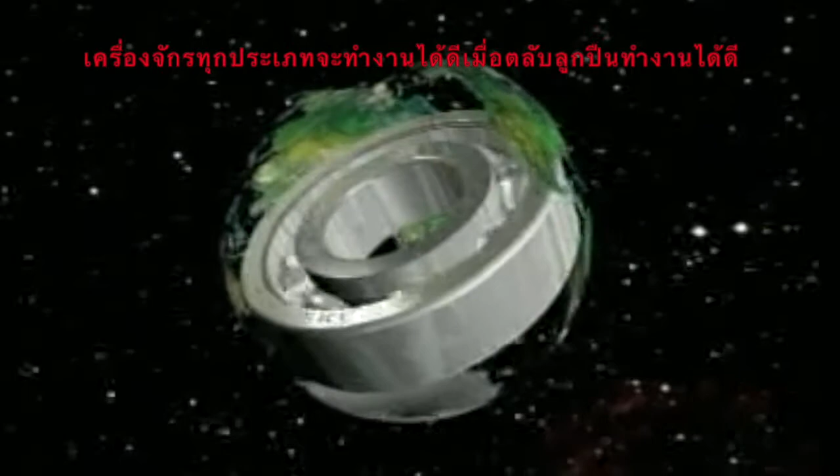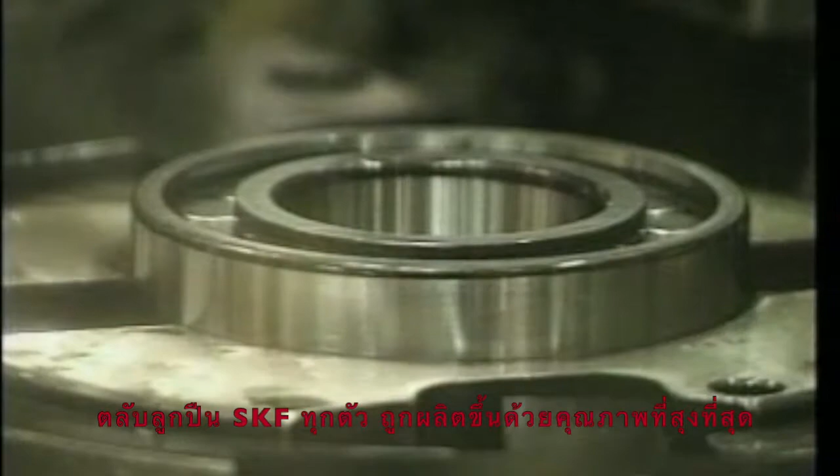In all industries, the efficiency and reliability of plant and equipment is dependent on the rolling element, the bearing. It's the heart of all rotating machinery. To ensure a long and trouble-free life, each SKF rolling bearing is a product of the latest technological development and manufactured to the highest precision and quality standards.

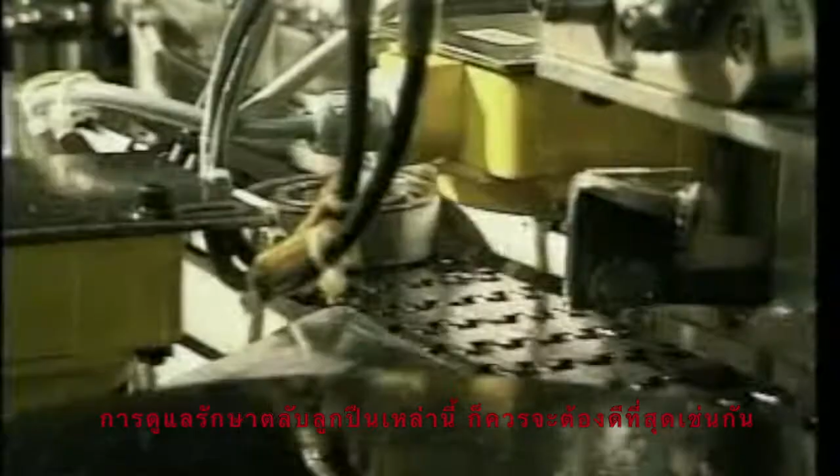It's essential that during replacement of bearings, they should be kept as clean as possible and that the correct handling techniques are used. Like the human heart, the service life of the bearing and the reliability of the plant will be compromised if any of these essential factors are ignored when replacing bearings.

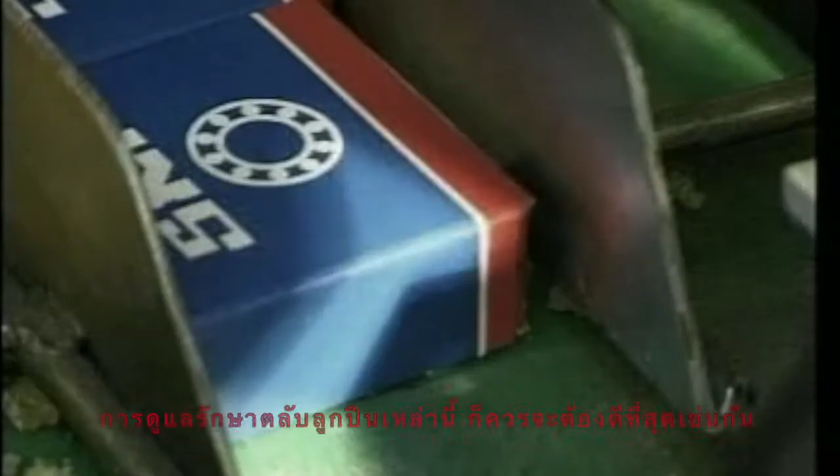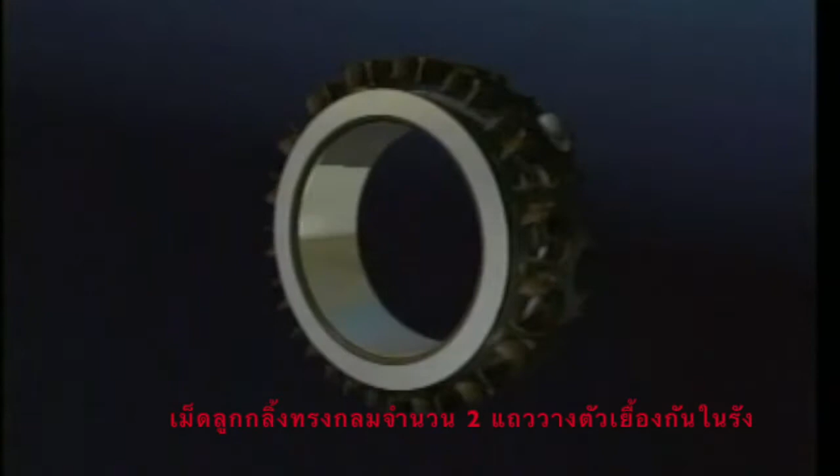This SKF training film is about self-aligning ball bearings. The self-aligning ball bearing consists of 2 rows of balls secured and separated on the inner ring by the cage, and a sphered outer ring raceway.

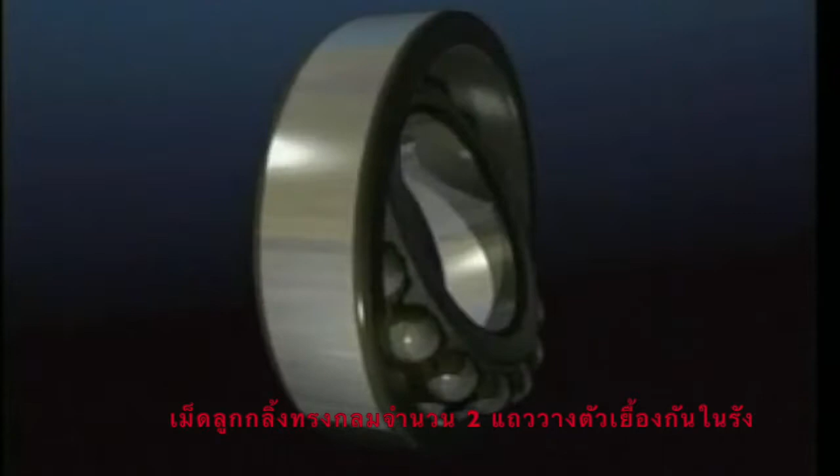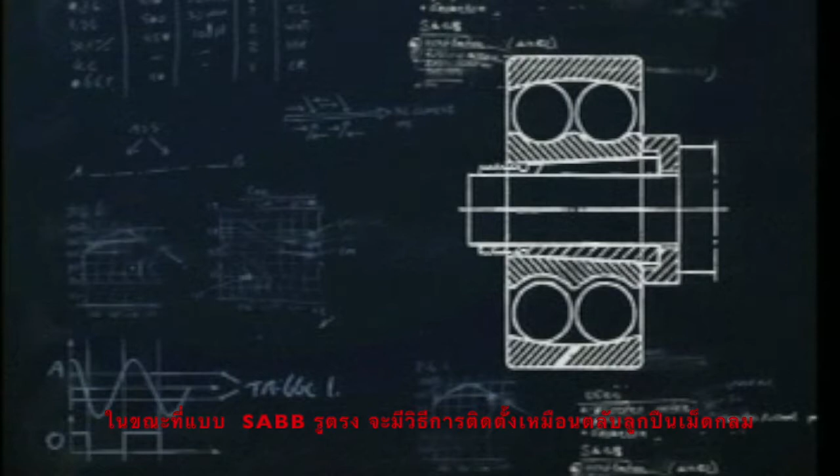There are 2 types of self-aligning ball bearings: those with a parallel bore and those with a tapered bore. This film concentrates on the tapered bore type because they're mounted and dismounted in a particular way. The parallel bore types are mounted and dismounted with the same procedures as used for deep groove ball bearings with a parallel bore. They're commonly used in applications like mixing, blending and stirring machinery, also in intermediate shaft positions and fan applications, where the ability for self-alignment is important and the loads are relatively light.

For the mounting of the self-aligning ball bearing with tapered bore, SKF supplies a lock nut spanner kit that ensures the correct bearing adjustment is achieved.

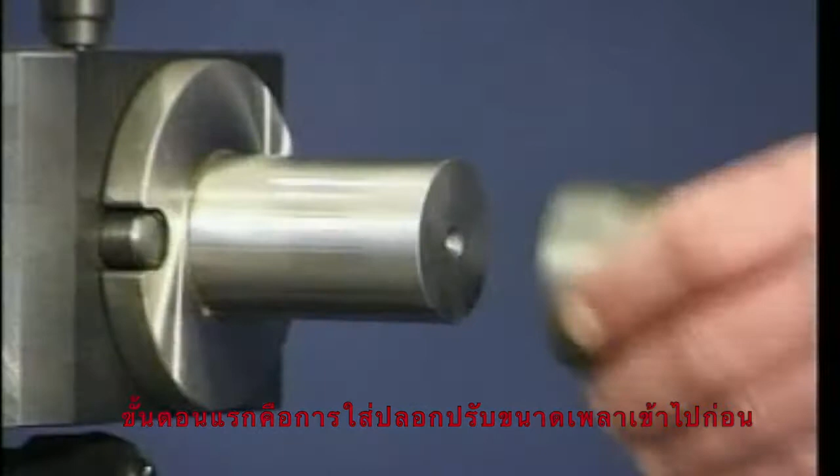Make sure that the work area is kept as clean as possible. Use some light oil on the mating bearing surfaces. Do not remove the bearing from its package until everything is ready for mounting it.

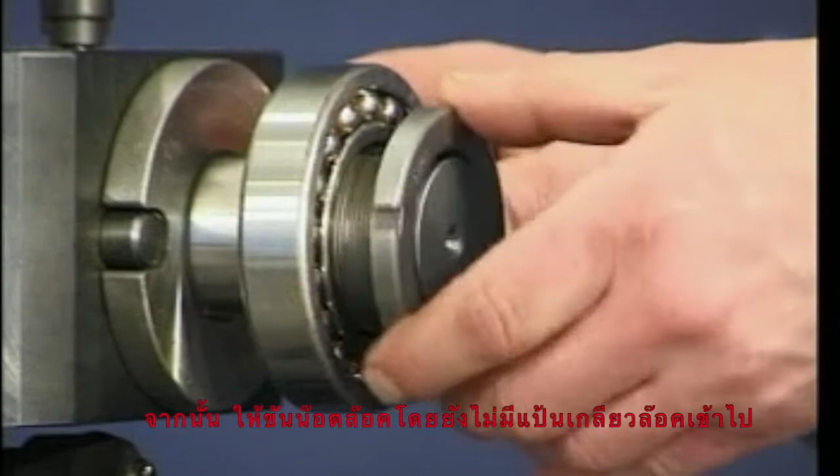In this case, the self-aligning ball bearing is mounted on an adapter sleeve. Put the bearing on the sleeve in its appropriate position. Screw on the lock nut, but without the lock washer.

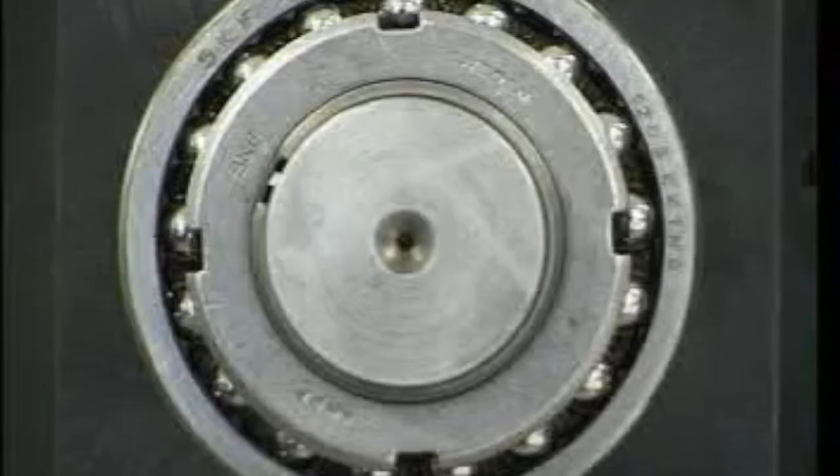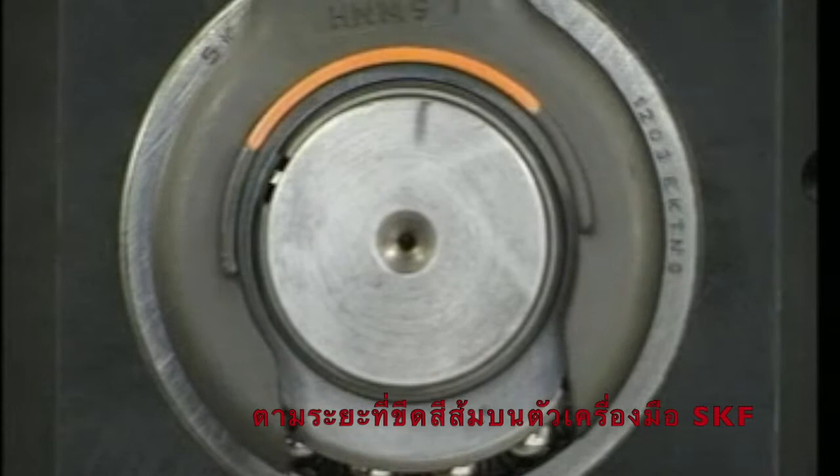Hand tighten the lock nut by using the lock nut spanner until bearing and sleeve grip the shaft. Then mark the shaft at the start of the orange adjustment range. Using the handle, turn the lock nut spanner up to the end of the adjustment range. The correct bearing fit will have been achieved. Remove the lock nut and replace the lock washer.

By securing the nut back on the sleeve and by bending one of the lock washer tabs into a matching slot in the nut, the correct mounting procedure for self-aligning ball bearings with tapered bore is completed.

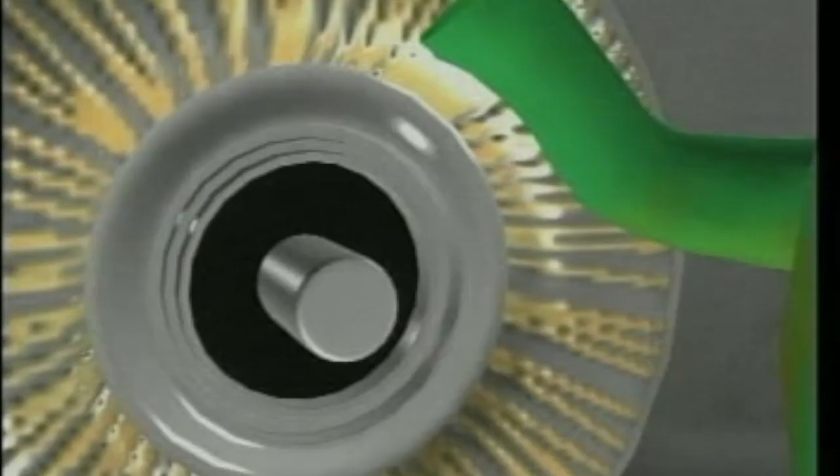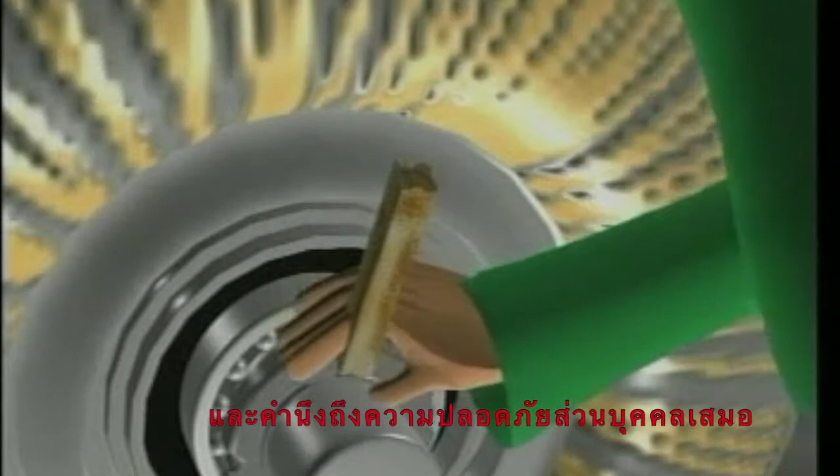Do not strike the bearing directly with any hard object like a hammer or a chisel. Always use the right tools for the mounting or dismounting of the self-aligning ball bearings and wear protective clothing at all times.

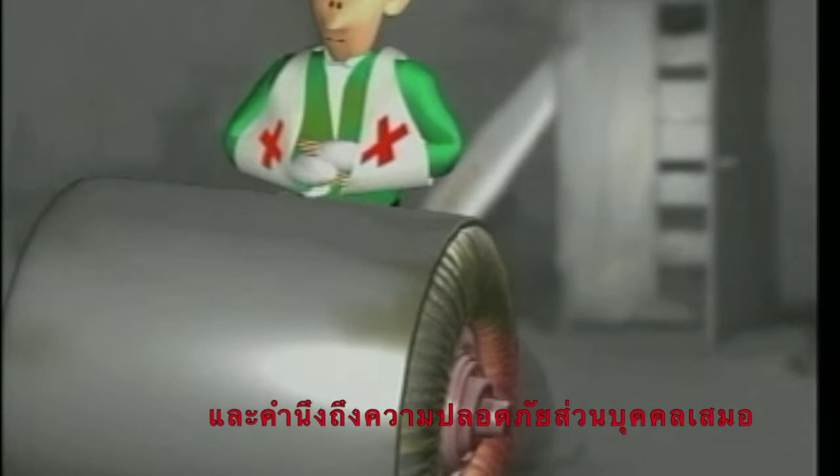To dismount a self-aligning ball bearing, start by unbending the tab of the lock washer and back off the lock nut with a turn.

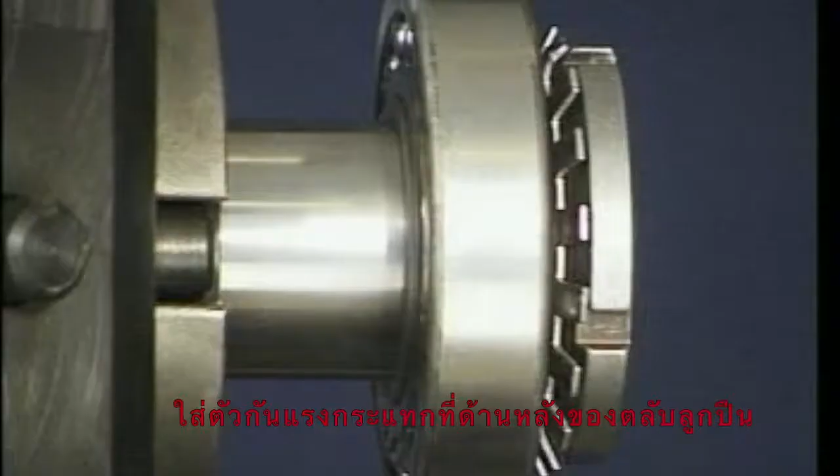Place a suitable steel segment behind the bearing, and with some sharp hammer blows, the bearing will be driven off the tapered sleeve, releasing it from the shaft.

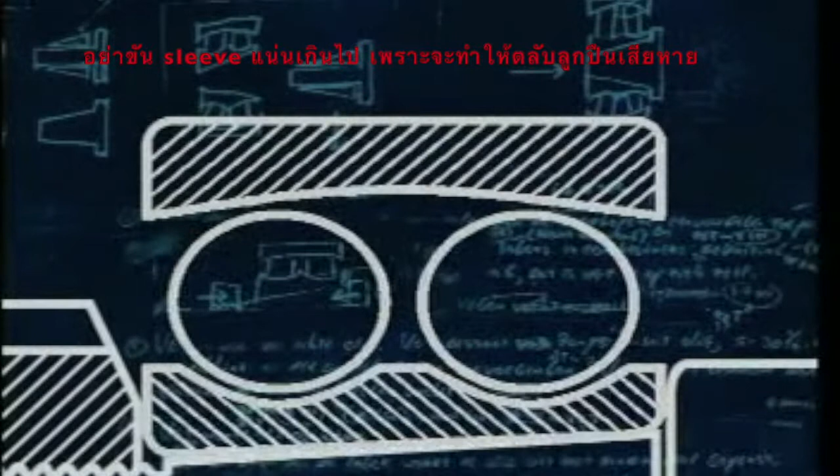The self-aligning ball bearing is supplied with a predetermined amount of radial internal clearance. When driving the bearing up the taper seating, take care not to drive it too far, so removing all of the internal clearance, as this will impair the performance of the bearing and dramatically reduce its life.

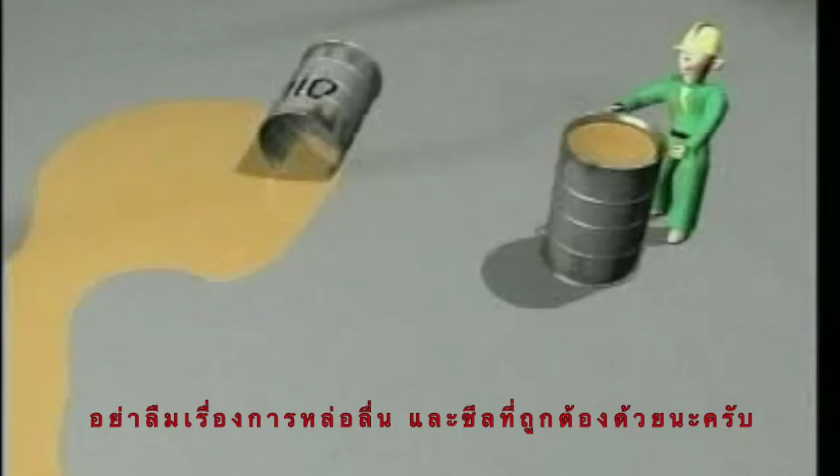The mounting of any bearing is not complete without applying the correct lubricant and ensuring the effectiveness of the sealing. Remember, effective bearing performance is dependent on cleanliness, careful handling, the right bearing, the correct lubrication, and good mounting and dismounting methods. Only then can the race for better bearing performance be won.